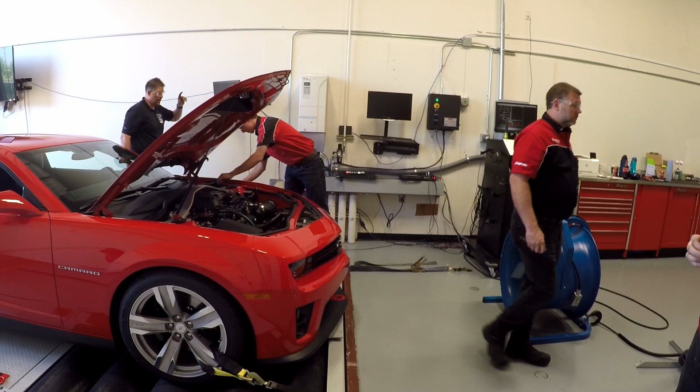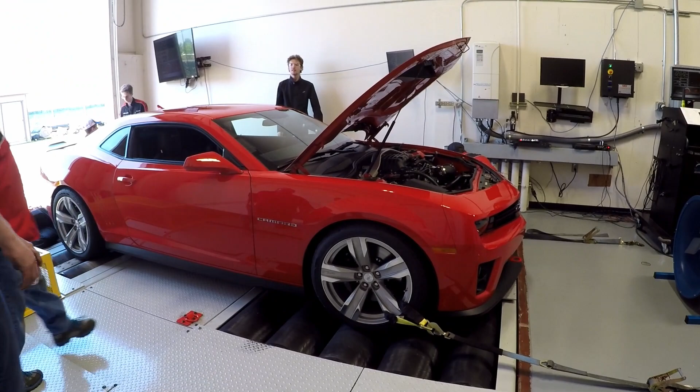Okay, so you could load it. Yeah, so we could actually go in and do like regens on cars and look at their output. Oh. So, but yeah, this has a clutch. It's an eddy brake. Eddy currents over here. Okay. So that's going to provide our load, and then we got load cells that give us our torque settings. Then we got a clutch that connects it to the front rollers. So in two-wheel drive mode, we're basically just disconnecting the clutches, and then it changes the calculation for the inertial weight of the rollers. So yeah, pretty cool little setup.

So pretty quick, we can switch right between front-wheel drive and rear-wheel drive. All-wheel. So you guys are all set up to teach tuning.

I need somebody to teach it. Yeah. As soon as you find me a teacher, we'll, yeah. So shout out to the YouTubers who want to come teach tuning at Linn Benton Community College. Give me a call.

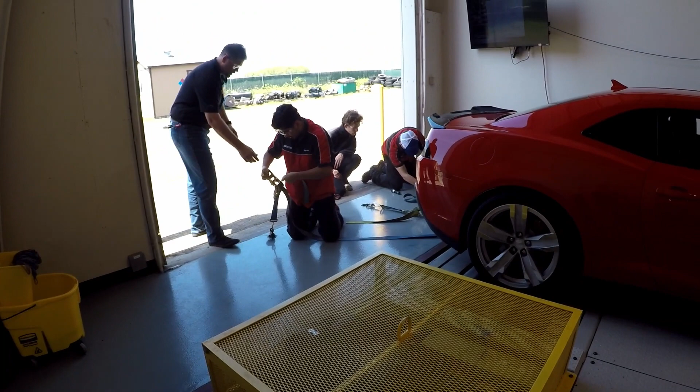Looks like this way? Like that? Okay. Yeah. So if you leave this way, and then you can pull it so you have a slack.

So they put it up on this lift here, and they're going to be doing a tech inspection on the car. This isn't something they normally do on Dyno Days. It's just part of their training. This is a really nice college. Show you guys around here a little bit. This is cool.

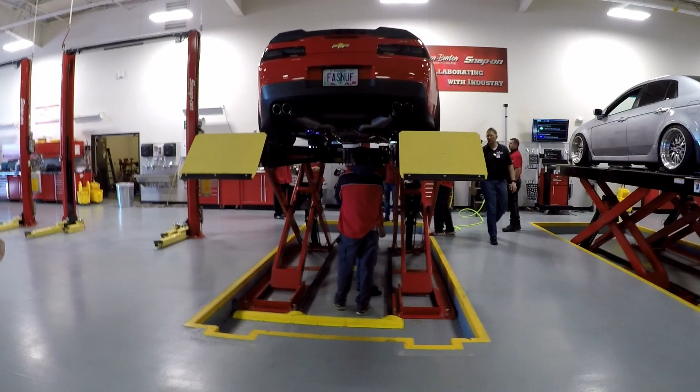So what are you looking for? Just making sure everything's sound. It's not going to blow up on the dyno. That sort of thing. Figuring out where you want to strap it down. All right. Just a standard check. Where's my rear strap? You got to figure out how to strap it in. This is Mike. He's one of the instructors. He's the one that invited me here today.

Now we got to worry about the exhaust heat, right? We got heat. There's a temperature shield. All right, who can go grab? Let's try to focus. We're going to have a lot of shiny stuff here next week. Okay. All right. So look. Next week, when we come through. Yeah, our Dyno Days. I thought that's tomorrow.

So if we're D-ringing through, we want to make sure we're not hitting here. So we're probably not going to cross strap this front, because the idea of the strap is to lift this around and choke it around the diff and get it pulled straight down. We got to be careful because the exhaust is here. So if we have our heat shielding, we can run our heat shielding through here. And we want to make sure we're not getting on brake lines or anything else that's going to get squished. Let's see, go slow.

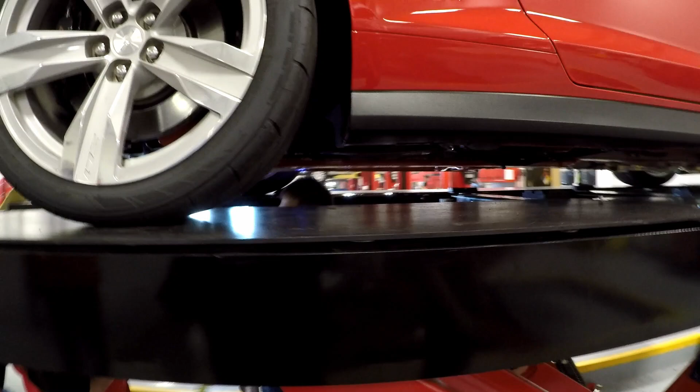So he's instructing them on all the different ways to tie the car down on the dyno and to avoid the hot exhaust of the car affecting their straps. And they have different ways of holding it down. I think the one he's using now goes over the top of the differential.

Now they're just looking for a hookup. It doesn't matter. Any spark plug wire. Oh, they actually have the display there. So this one over here looks pretty good, but this side, as long as we're not. I haven't been here in years. Okay, here we go. Ready, rock? Yep. Okay.

There's one heck of a vibration on this thing, and I don't know where it's coming from. 691 on that one. What was I on the other one? Your very first one I saw was 683. Yeah. We can just do a 3K snap, and we'll just make sure we don't lose it. Oh, okay. All right, here we go. Probably going to be the final pull. Okay.

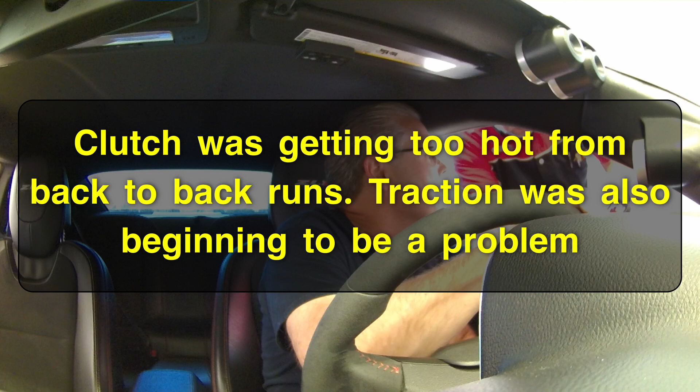It felt like it spun. I mean, it just went, whoa! Huh. At about the same time. Yeah, I'm wondering if that's just exhaust. It smells clutchy. Really? Okay. You smelled it, huh? Yeah. You can smell it? Okay. Well, you can see it. Better clutch than something wrong with my engine. Oh yeah, I can see it.

Wow. Is that normal? You get up to that spot, I mean, that might be why I saw that, because I was watching the tach and it was climbing normal, and then it started climbing real quick from like 45 to 55. Yeah, when it breaks loose, you can watch that speed go up. Yeah, it went up pretty quick. That must have been when that kicked. Yeah, so almost guarantee it. That's strange. I wonder what's up, because that clutch is supposedly a 1200 horse clutch, and I'm not. I mean, I might be 800 at the crank.

So, anyway, just so that you're aware of it. Okay, well, that's fine. You're supposed to break it in, and I probably got 1,500 miles on this clutch driving it around, so maybe it's not broke in enough. It is now. Alright. Thank you. Yep.

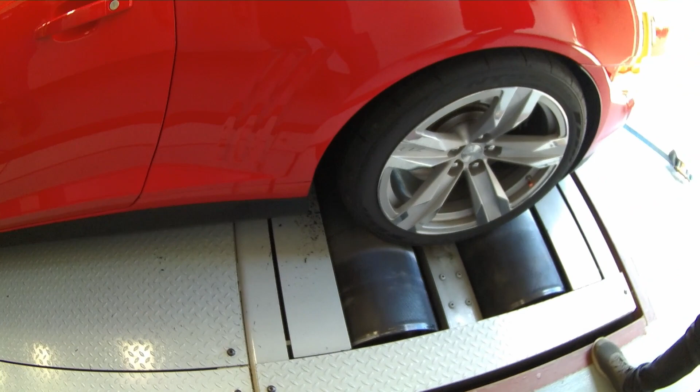All right. Well, let's go see what I did. Apparently, the clutch is smoking a little bit. Well, you good for today? Yeah. All right. That told me a lot. So yeah, that's what it looks like when you spin them. Oh. Cheese grater. Did it spin them? Yeah, that last run, that's why your speed went up. That's why your engine speed spiked. Yikes. It cut you off. Yeah, it cut you off.

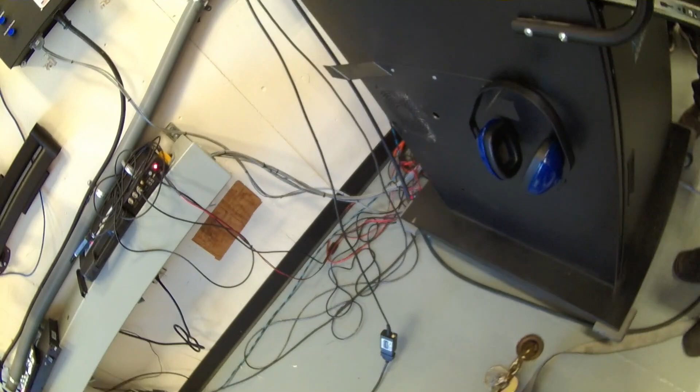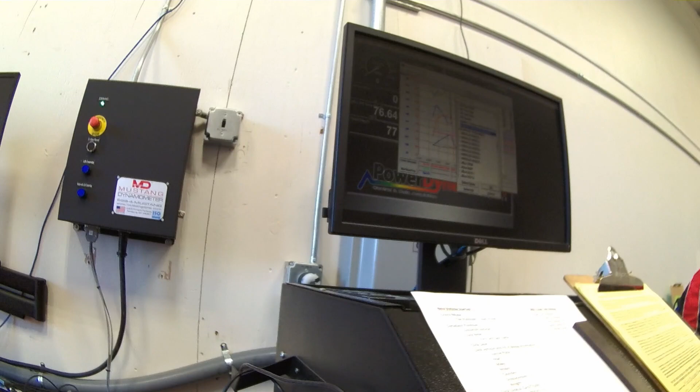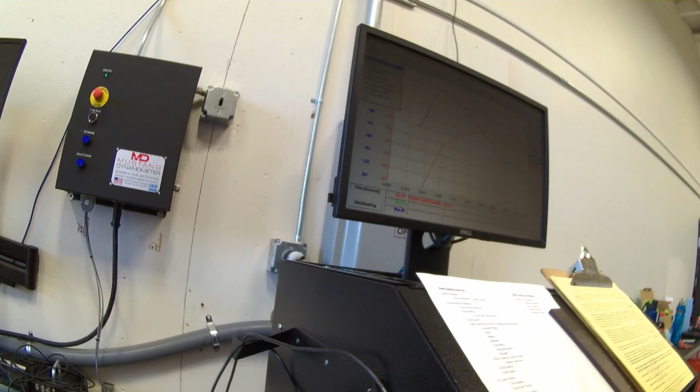So did we get a number on that at all? Yeah, let me go back. Looked like my clutch was slipping and my tires were slipping. Really? Yeah, got some rubber back there. Looks pretty low. 541, 442. Interesting. Okay. I didn't expect to see the smoke out from under the car. Yep. Set the parking brake, we're going to lift it up so we can get in there.

Alright, so here's a first dyno pull. Logging. So I realize the horsepower here isn't the same as what we saw on the dyno. The white one's torque. The green one is horsepower. I don't know why HP Tuners has this like this, but for whatever reason, it's what it's saying. My purpose is to show the difference between run number 1, run number 2, and run number 3.

So at 6466, it says 794 horsepower, 81% duty cycle, 15.3 pounds of boost. That's kind of low. Normally I'm 16.5, and a lot of it has to do with the air intake temperature. Air intake temp is 111 degrees, manifold temp is 127. If it was a lot cooler outside, I'd be making more horsepower, but this is the numbers that we got. So this was actually 674 horsepower at the wheels this run, according to the Mustang dyno. So let's go to run number 2 and see what it looks like.

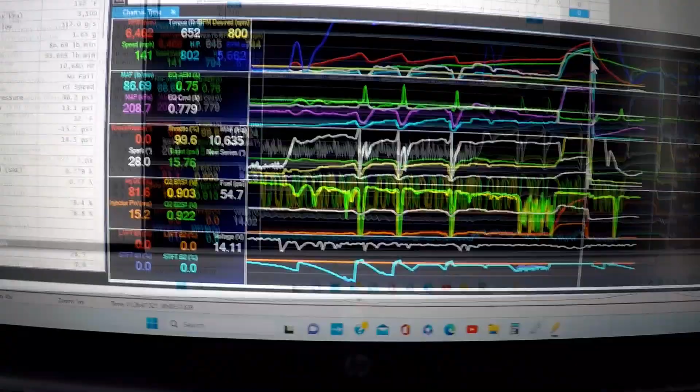Okay, this is the best I can get this to show maximum. So that's 6,462, 802 horsepower. So it's up quite a bit. I added 2 degrees of timing to the ethanol table. Now at 28 degrees spark, 81%, almost 82% duty cycle, 15.75 pounds boost, and my manifold air temp's 132, 108. So my intake air is a little bit cooler.

I am running slightly rich. 0.75 is a little bit rich. I would have liked to see 0.80. I might have gained a little bit of horsepower being a little bit leaner. So let's go look at run number 3. All right, so this is a third run. This is the one they couldn't give me a graph on.

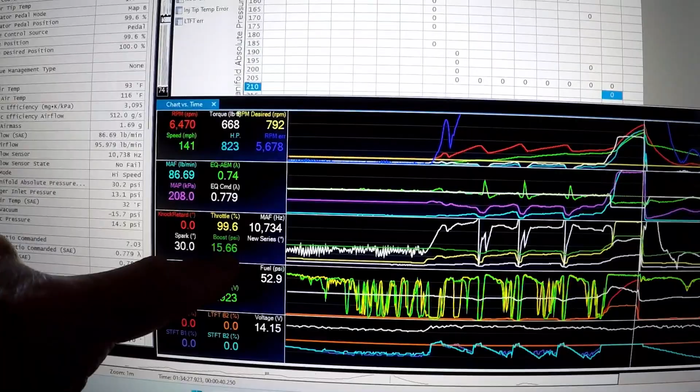It's actually showing almost 23 horsepower more than the second run. A little bit less boost, my intake air temp was quite a bit lower, only 93 degrees and 116 on the manifold. So no doubt this run is better than 675 to the wheels. I just don't have it documented. I have no way of knowing really what it is. Here it's showing 20, what was it, 20 more horsepower. So you could assume this as flywheel horsepower. I guess that would probably be the best way to determine that, why that says that's so high.

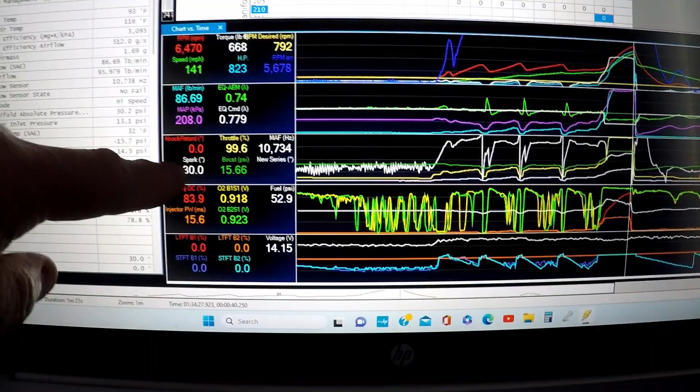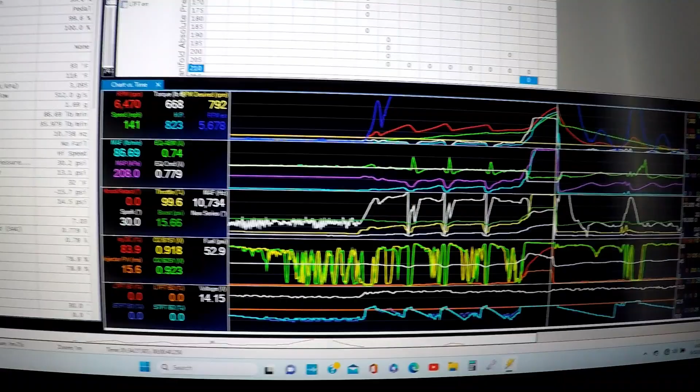But at the dyno, 675 was the best it ran on run number 2. Run number 3 looks better. Injector duty cycle still nice at 84%. 30 degrees of spark, and it gained power. So it might gain with another degree of spark. I don't know. Wasn't able to do it. He had other things to talk with the students about. So maybe next year, but I know that my spark table is good right here for now. I can work on my fueling a little bit, and yeah, I'm really happy with the car, happy with the way it performed.

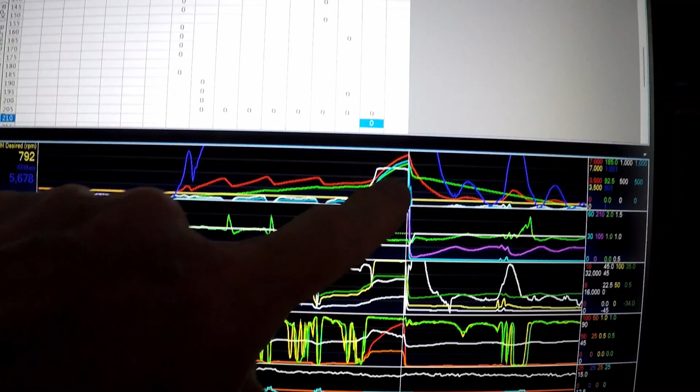So if you're curious, these bumps here, this is where I started the car, first gear, second gear, third gear, and then I get up to about 3,000 RPM and basically put it to the floor. And that's how that works. The white line is torque that you see there. The aqua colored line.